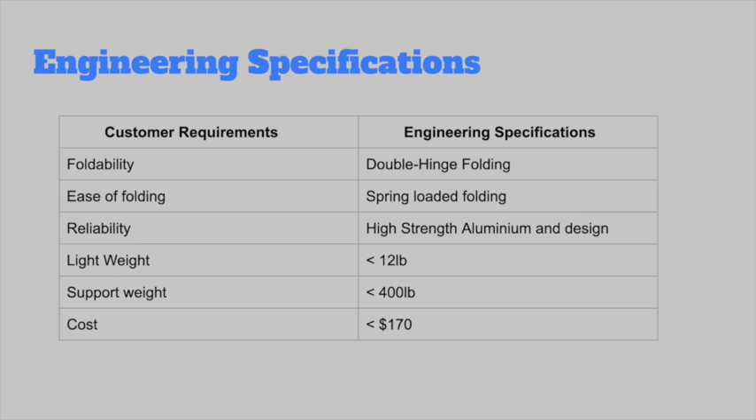So for our research and results, we believe that the current walkers are too difficult to unfold and they're way too large when needing to be stored. We also found that a lot of walkers require outside help in order to get them folded, a little bit more assistance with that. And they're just kind of awkward and hard to fit inside of an average trunk or sedan.

And so for our design and manufacturing constraints, we knew that the geometry of the sliding mechanism would be the hardest obstacle to cross because our component doesn't just slide up and down or side to side. It uses a unique slope, and if it wasn't designed properly, there'd be a lot of friction. It would maybe not slide all the way up or all the way down. It could easily get stuck along the track.

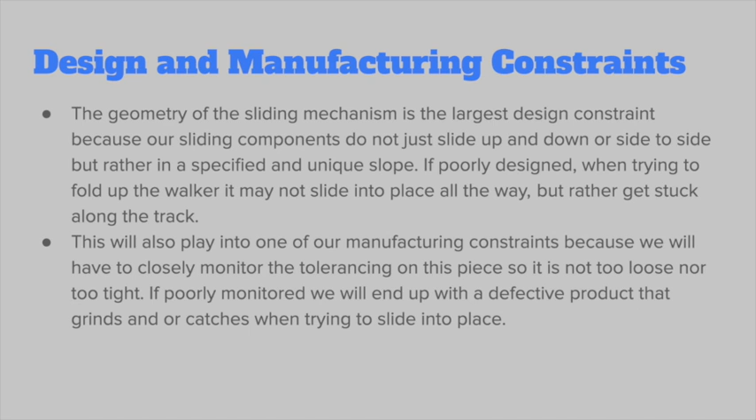And then as far as manufacturing constraints, we knew that because of those issues, we would have to monitor the tolerancing on this particular piece so that way the sliding isn't too loose or too tight. If it was poorly manufactured here, we'd end up with, I'm sure, a few defective products that might grind or catch when trying to slide into place.

So this is our design here, showcasing our dual axis folding mechanism. As you can see, it folds on the sides and it folds at the top, and then it creates this nice cane-like form that makes it much easier to store and put in relatively tight places.

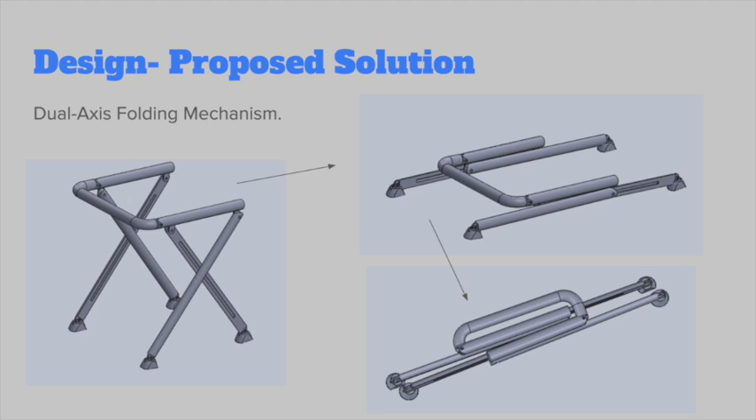So potential problems that we kind of had to put some thought into in order to guarantee a great product. The first one was the actual folding design itself. We knew we had to design it to where when the arms at the top are folded inwards, that the legs don't hit each other or clash together. The locking system was also another big potential problem that we had to make sure that it was strong enough that it was going to guarantee that it would be safe for the user to use, as well as that it wouldn't fail or corrode or anything like that, and that was a really big safety issue there.

And then another one would be just the factor of safety of the hinge as well as the locking mechanism that I just discussed, just so that we know that the walker has good structural integrity and isn't going to fail or cause any kind of injury, anything that could cause issues with the user itself. And we know there'd be quite a bit of stress since it's having to support different types of weights of people.

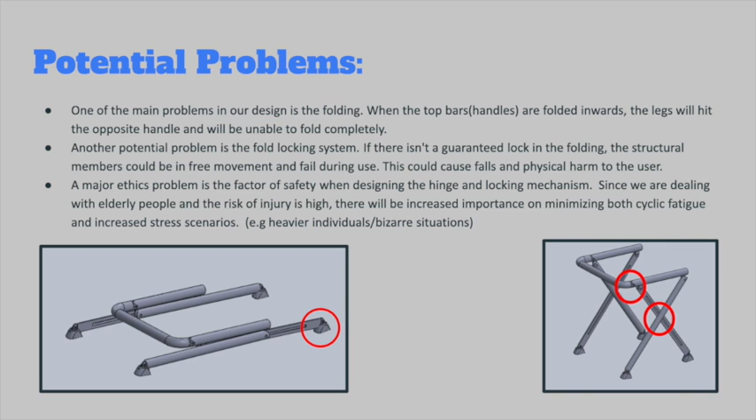All right, hello, this is Brant, and I'm going to be going over the locking mechanism and the spring system on our walker, some more of the moving parts. So in the locking mechanism, in reference to the picture in the top right, what we're going to have is a simple use of plugs with Phillips head screwdriver tips on top. These will allow the slider on the inside to roll over the plugs and then lock into the one that you have specifically marked to your height.

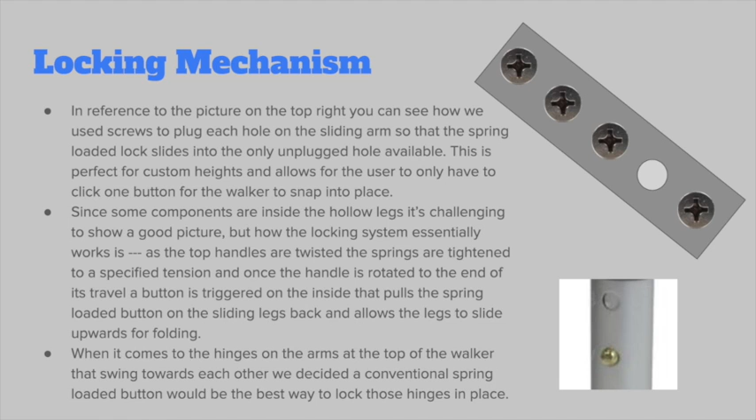Since the components are inside the hollow legs, it's really challenging to show a good picture of how the locking system essentially works. But as you will see in later CAD modeling pictures, it is much more clear. And as for the spring system,

Our spring system is definitely essential for the walker to fold up and save the user from having to bend down and unlock the sliding legs. As we mentioned before, it's very important that this is easy to use and compactable. So both are very, very high on the priority list, and so we went after the design on these two parts very rigidly. So the springs are attached to the handles, and they are left in a zero tension state while the walker is in use.

We will be using a twisting handle mechanism to load the springs, and it will be more clearly shown in the next slide.

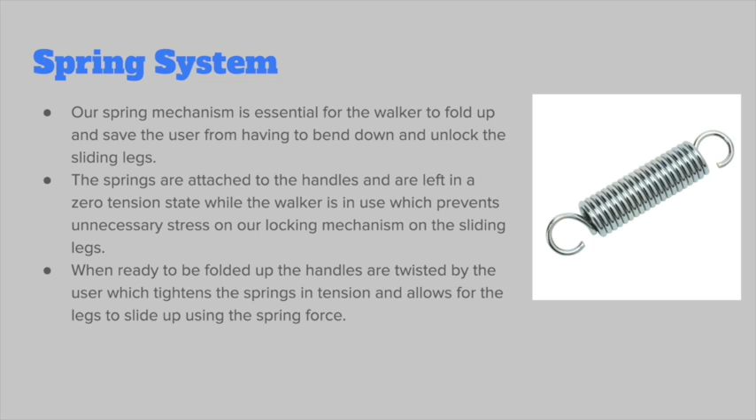And here we go. So as you can see in the two pictures, on the left is the unloaded. So we have the full walker in its unfolded state, and you have the unloaded springs as seen in the two red circles. There's no tension in them, and therefore the walker isn't going to be forced to be pulled upwards.

But as you can see, as you twist the handles, and that will be shown in the next slide, those springs move inward on two little pins that are connected to gears. So they become loaded, and when the user unlocks or presses the button to unlock the legs, they will come up to meet him rather than him pushing them downwards and bending over.

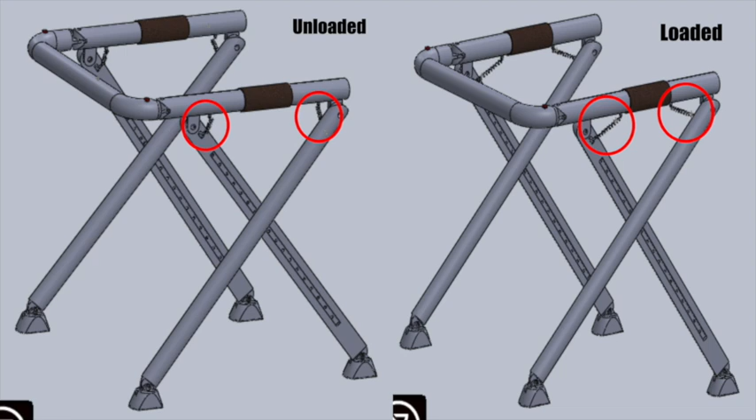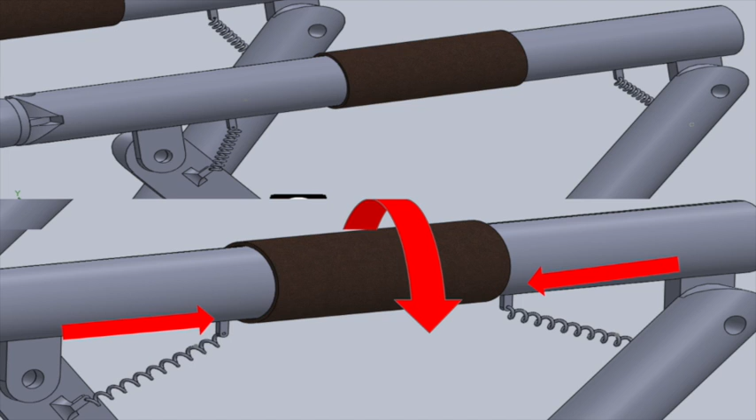So here's the video. It doesn't have the springs in it, but you can see, if you look closely, I know it's a little bit difficult to see, but that centerpiece is rotating, and it is causing those little spring loaders to move inwards and outwards.

So very nice feature. And it is important to mention that the handles will remain in the locked position until the loading of the springs is required, and then they will unlock the handles and twist them up to load the springs. And it's a very easy, efficient way to do it. And yeah.

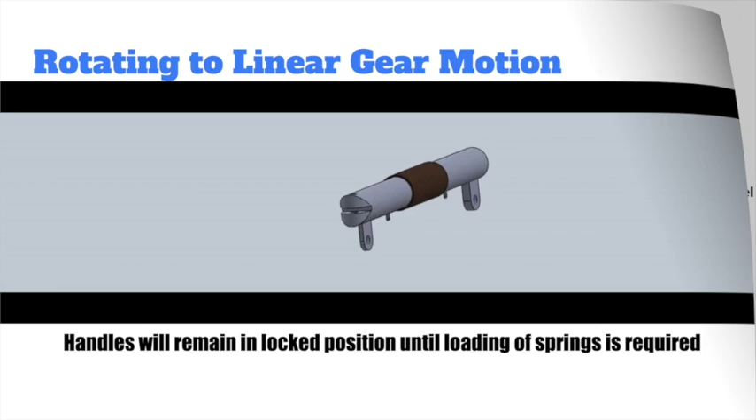So here's our function diagram. We have, of course, the walker, and then we have two main parts, which is the body and the folding mechanism. The body would have the aluminum legs, the pivot joint, sliders, front support, handles, and the feet. And the folding mechanism would have in its component level the spring-loaded folding, the double hinge folding, and the button that they would press to fold the walker on either direction.

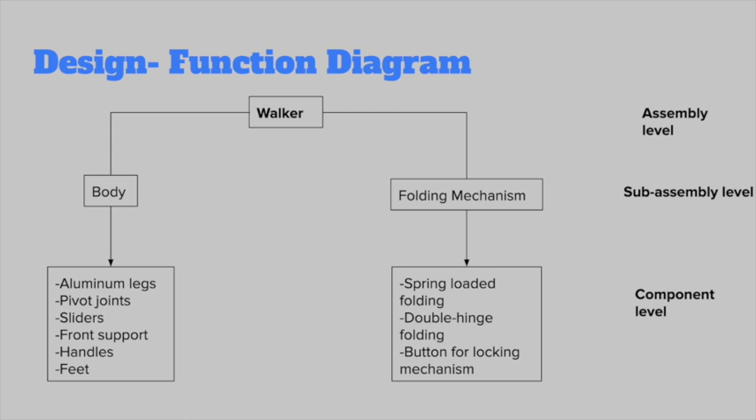For the procurement plan, we created a table that basically shows all the parts needed in the creation of our walker. Most structural parts are comprised of aluminum. All the data in the procurement plan was obtained from 8020.net, which sells all kinds of parts for diverse projects.

Given the cost per unit, the procurement plan allows us to have an estimate of the total cost to make and build a single unit, meaning that this procurement plan would actually help us understand how much the cost would be for, for example, a prototype rather than mass production.

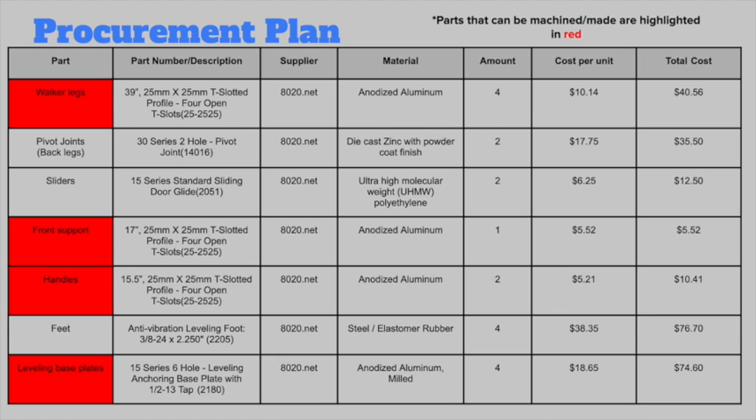For the manufacturing processes, the manufacturing processes were separated into two categories: individual production or mass production. For individual production and prototyping, we considered using mostly pre-made parts from 8020.net, which would reduce the machining but would increase the price of a single unit.

For mass production, we considered direct manufacturing, which is a process commonly used in the electronic and automobile industries. This process would reduce the cost per unit, however, it would be less individual driven.

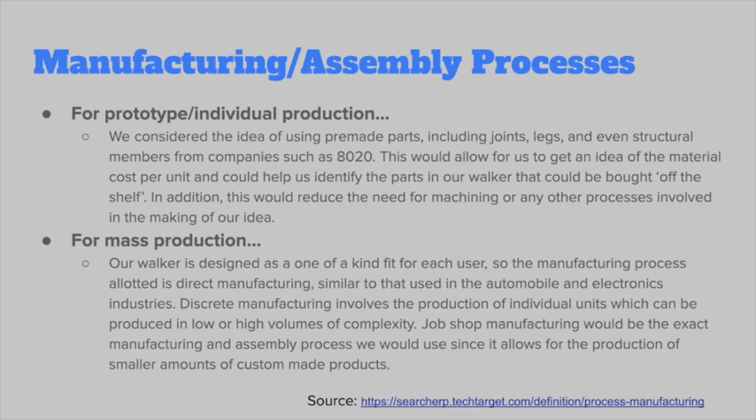All right, and this is the final prototype picture. We have the dual axis folding mechanism. It's really, really efficient for storage space, and I believe it's a great design and greatly improves on the walker's efficiency nowadays and the ease of use.

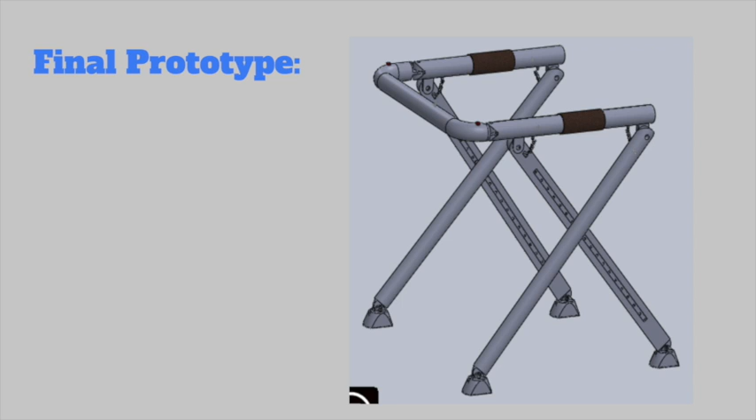So for our summary and key points, in short, we wanted to design a walker that is simple and easy to use for the older generation, but is much more portable than a walker has ever been. We were able to achieve this with our dual axis design that allows our walker to fold into the size of a closed umbrella. Really, really important that it can fit in the back of a sedan.

Structural integrity was a concern when introducing something that folds into something so small compared to when it is in use. However, we found that aluminum was more than capable of achieving the structural integrity that was desired. Our locking and spring mechanism are by far the most innovative component of this entire project, and were designed in a way no walker has ever been before.